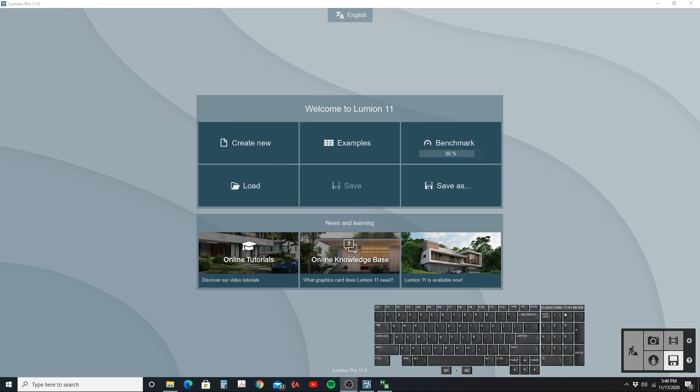Okay guys, so let's go over some of the new features of Lumion 11. And as you can see here in this video, I actually added my keyboard. This is not a new feature. This is just so you can kind of see what I'm doing as I maneuver through Lumion 11. And we're going to go ahead and open up one of the examples. I'm going to open up this downtown development scene, and we will work with that one to demonstrate some of the new features. So just give that a second to load up.

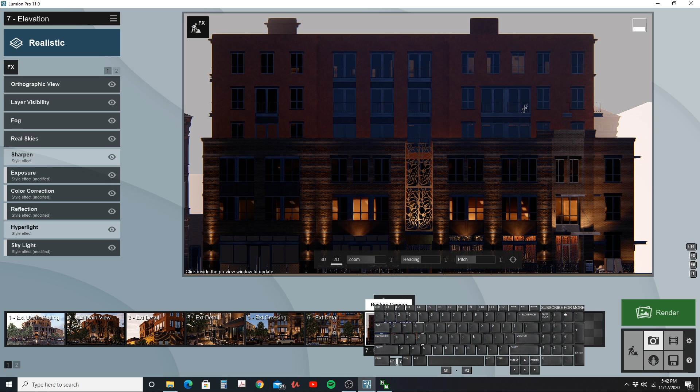Now, one of the new features I want to check out is the orthographic views. So to do that, I'm going to go to photo over here, and as you can see, this looks a little bit different, but not too much that if you're new or if you're coming from Lumion 9 or 10, you're probably fine operating in Lumion 11 so far anyway. So let's go to photos, and here I think this one's already set up as that orthographic view. So I'm going to try and recreate an orthographic view.

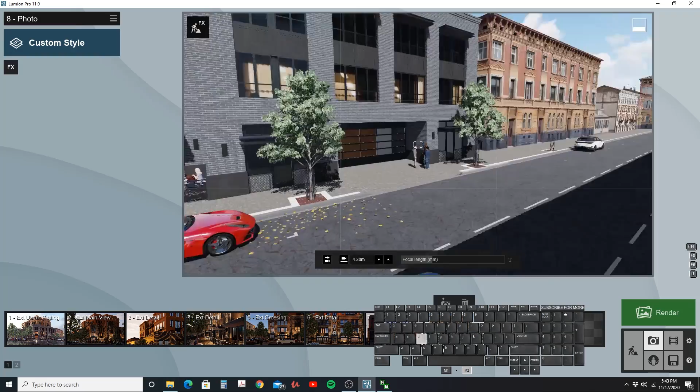So let's click over here, and we're going to create a new scene. I'm going to click to store a camera view, move around, and let's get an orthographic view of this side. So I'm just going to maneuver my camera and get as even as I can with that. And I'm going to snap the picture. And so I'm going to go to add effect. And here in the featured category, boom, it's the first one, orthographic view. So let's click on that and see how it works.

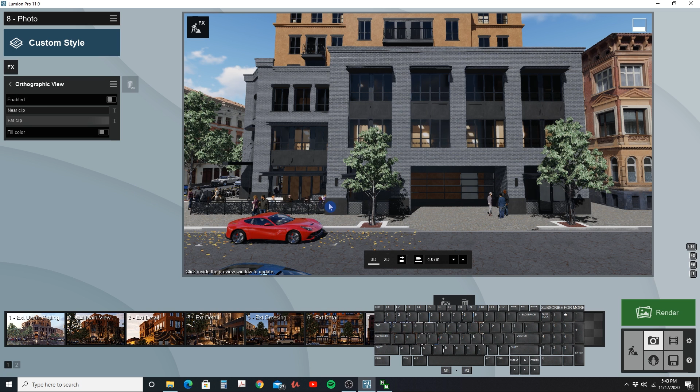Okay, so first thing I want to do is enable it. So I'm going to click here. And there we see it's already flattening it out to that 2D look. So here you can see it toggled from 2D to 3D. So there's your 3D view. Here's your 2D orthographic view. So this is actually a pretty useful feature when dealing with architectural drawings. A lot of the time they're used to seeing it in that 2D view.

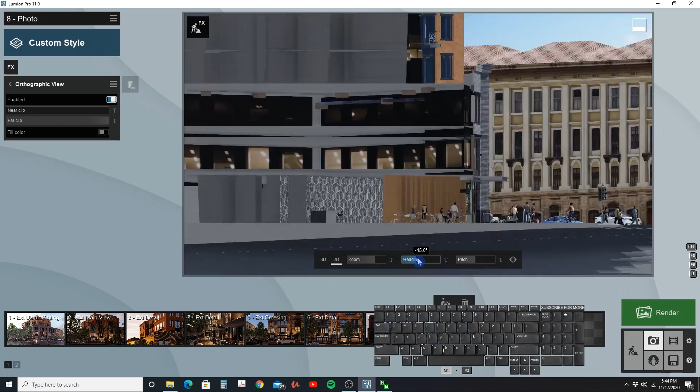Now, how do I get it just right? Because as you can see here, it's slightly off. So I think we have to do that here under heading. See here it's 82 degrees, and if I just slide it, it jumps to those 0, 45, 90s. So that's pretty good. So I'm going to go right there to that 45, and then here the pitch, you can see it's negative 1.9. It's a little off.

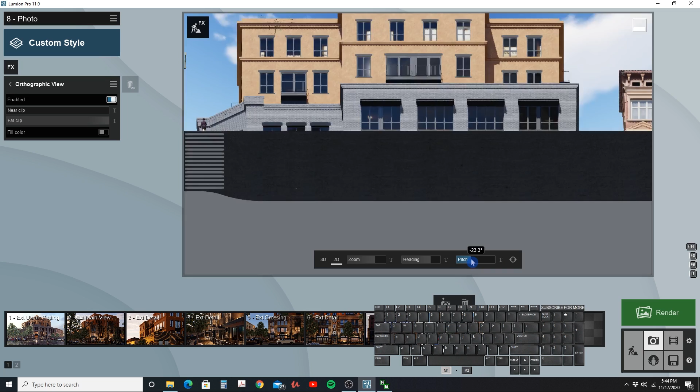So again, if I just click and drag my mouse, it jumps to that 0 point and some other numbers. I'm not sure if it'll let me type in anything. Let's see if it does, and not really. I think I can hold down shift. That's usually a way to very gradually increase your increments in Lumion, if you hold down shift. But I'm just going to try to go to 0, and there we go. So pretty easy. There's that orthographic view.

And let me see if I could rotate it. I guess we could affect our zoom. And here's another couple features I saw. We have a far clip plane. So you see your background is all the sky. So let's say we wanted to clip that. So the far clip, let's see if we can adjust that. And there it goes.

And here we can adjust the fill color. So let's click on this. And there it changes the color of the area that's being clipped. So I clipped the background, which is the far clip, and it just changed everything that's clipped to whatever color I select here. And I can click here and adjust the color to whatever it is.

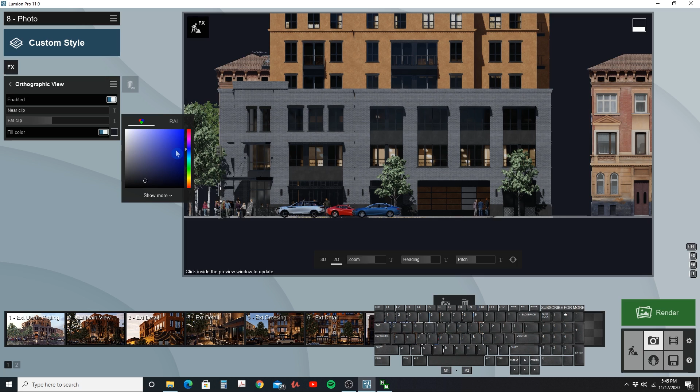So let's say if you're printing out something that's more of a construction document, you may just want it to be white so that it just blends in with your paper. So that's actually a pretty cool feature for the far clip. And then I'm assuming it's the same for the near clip. So we click here and drag our mouse.

There we can see it starts clipping out items in our near clip, or the objects closer to you, and there it just starts cutting everything out until you clip everything. So okay, pretty cool feature, the new orthographic view. I like it. Good job, Lumion.

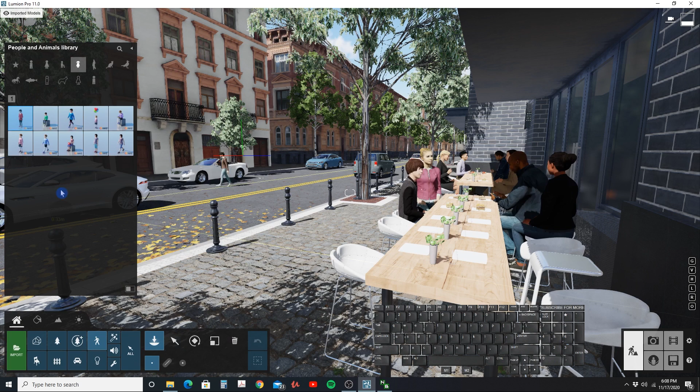Okay, so the next feature that's new to Lumion 11 is they added a lot more characters to your library. So if we go over here and make sure you're selected on this icon here, people and animals, and you go to place objects, they have quite a few new ones. I'm not going to go through all of them, but some of them are pretty cool.

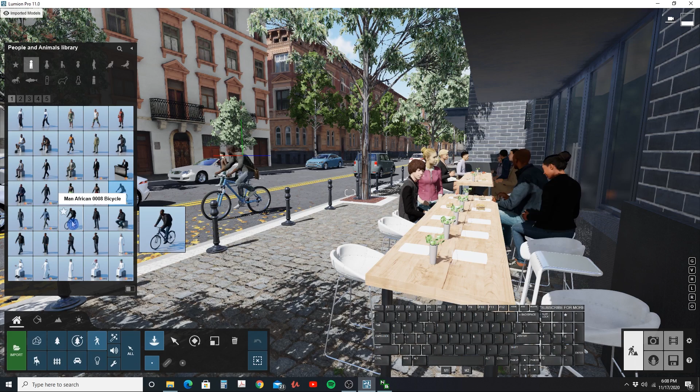Here we have someone on a bicycle. They seem to put a lot of people on bikes. A lot of new people there, which is pretty good. You know, you kind of get tired of using the same ones, so I'm glad Lumion's added quite a bit of new people to their library here, and very good detail as well, as you can see. Kind of get over here, kind of see a little bit better.

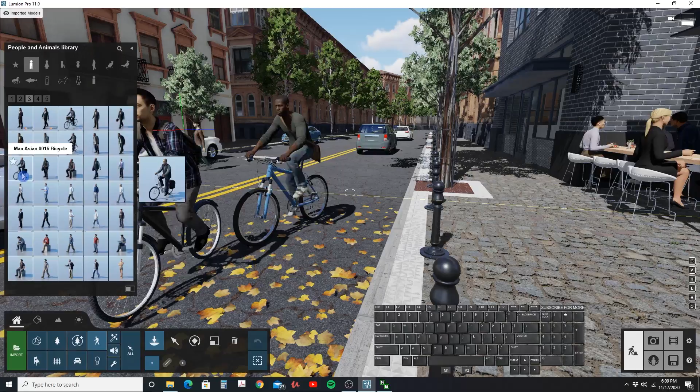And let's go through a few of these just to see some of the new items on here. And some of these, if they're on Lumion 10, you got to forgive me, I don't go through all of them, but it definitely looks like there are some new ones in here. Here we got another person on a bike, lots of bike riders. And even sitting down, I know there's some new ones that I noticed earlier. Let me see if I can find some. And I know in the women's category there was more.

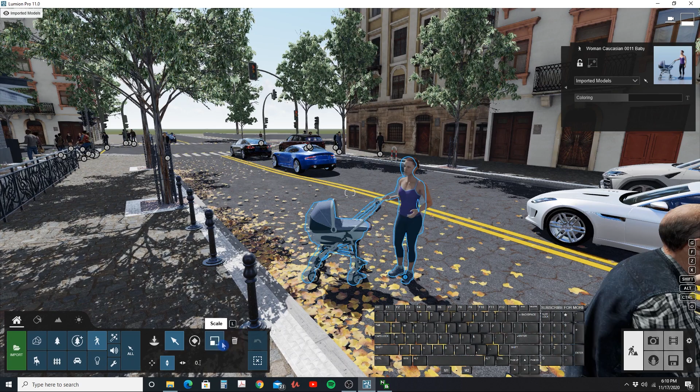So we go over here and let's go over to maybe this number 2 here. And let's see. Yeah, a lot of these look very familiar. I think some of these, they're kind of doing a little bit more. I'm gonna delete that one. Let's see.

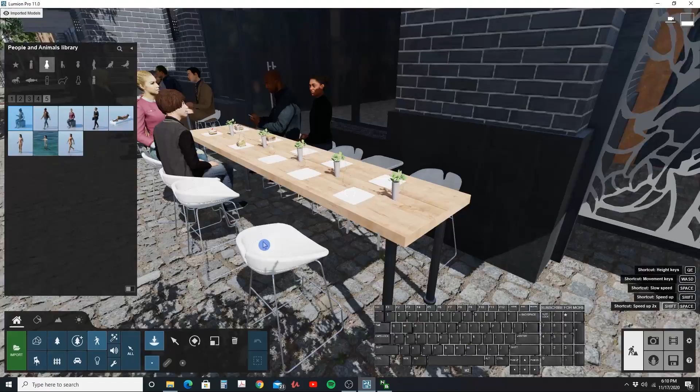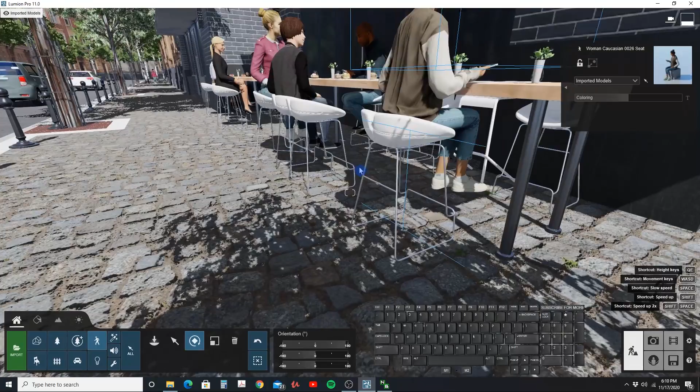And have you ever wondered how to set these just right? You can hold down shift and use the up to just move them slightly. And if you go over here to rotate, you can rotate them to the angle that you want. And it looks a little off because they're sitting high up there, but shift them in place there. If we move her in here a little bit more, hold down shift and just slide them. And that looks a little better.

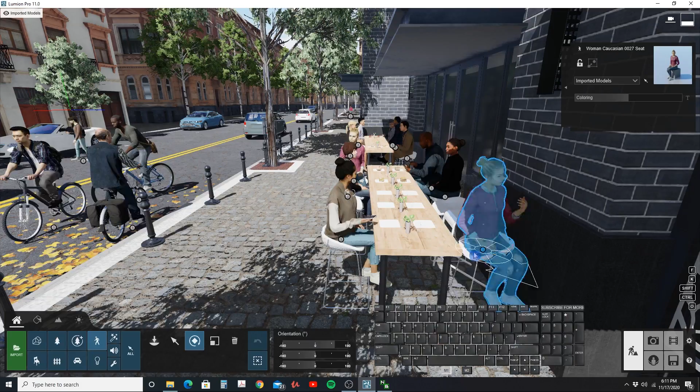And I believe that's a new character as well. I don't remember that person being in one of the selections before. And here I believe this is another new one as well. So we can click here and just rotate her. And that one seems to fit pretty nicely on there. So pretty cool, some cool new people. I believe there's one over here of this guy on a skateboard, which you may have seen in some of the previews.

And there you go. So obviously you can go to your video animation and actually make some of these people move. And I think we can see some examples here. These are some preset settings from the scene, and you see some of these people in action. And let me go ahead and do something here. Let's see if we can hit copy effects, and we'll create a new scene. So I'm going to zoom in down here to these new ones that I created.

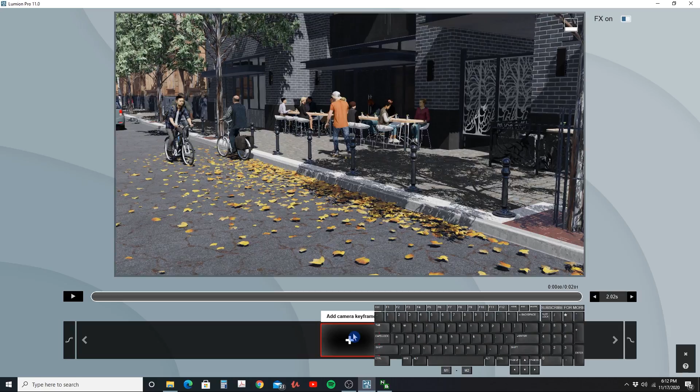I'll go ahead and click add camera. And we'll add another scene. Go ahead and click OK. And if you click here, we're going to see they are all static, right? They're not moving. So let's see if we can make them move. I'm going to go to FX. We're going to go to animate and we'll go to advanced move.

And we'll select some of these guys here. We're going to go to move. And I'm going to set my time down here to the beginning of the scene. And we'll move him back here. And we'll move this guy right about here. And we're going to try to avoid an accident here. Let's see if we can move him about there.

Okay. So if we time it out, here we can see our time measure here, 1.3 seconds. I like to count it out myself, so I just go, 1, 2, 3, 4, whatever it is. Actually, we'll go all the way to the end to 9 seconds.

And so I kind of like to move my characters here and kind of count out that time to what I think it would take them. So let's say if they're starting maybe down here and we want to go to the end. Whoops, I kind of messed that up, didn't I? So let's delete that. The beginning point, we're going to move him back a little further. Then we're going to go all the way to 9 seconds.

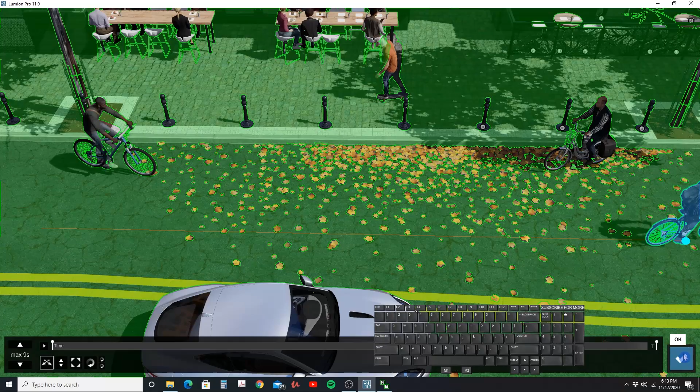And I'm going to hold it down, just go 1, 2, 3, 4, 5, 6, 7, 8, 9. That speed to me feels about right. I'm going to click OK. And now if I click play, we'll see if that kind of looks right or if it looks like he's moving too fast. And now it looks like he's moving maybe a bit too slow.

So in order to fix that, I'll just go back to my advanced. I'm going to go all the way to the end of the time. And let me find him again. Here he is. And I'm just going to move him back. Is that right? No, we need to move him forward. There we go. Okay, so I'm going to go ahead and click OK. And we'll hit animate, and there we go. He's moving. Okay, to me that looks a little more natural.

And you can do that with all your characters. So pretty cool. I like the new features that Lumion has added, the new characters I mean. So another one, good job Lumion.

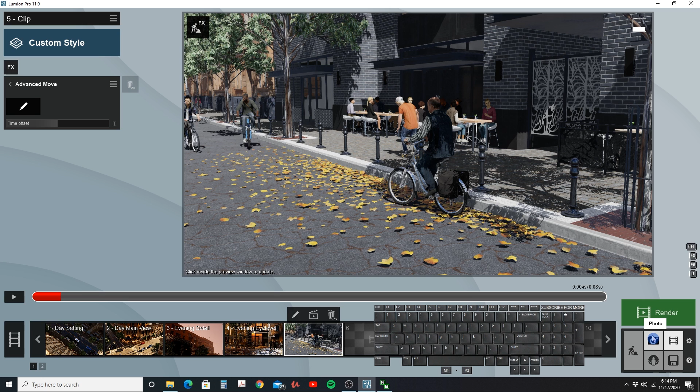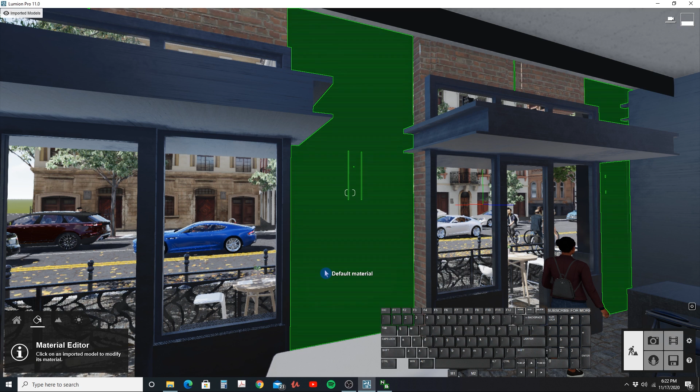Okay, so another new feature is that Lumion has added some new materials. So let's go ahead and try them out. I'm going to go ahead and select this default material, and really it seems like they've added materials to pretty much every category. So if I go to here to, actually I want to go to indoor. Let's go back, hit indoor. And some of the newer ones I've noticed were in the tiles category.

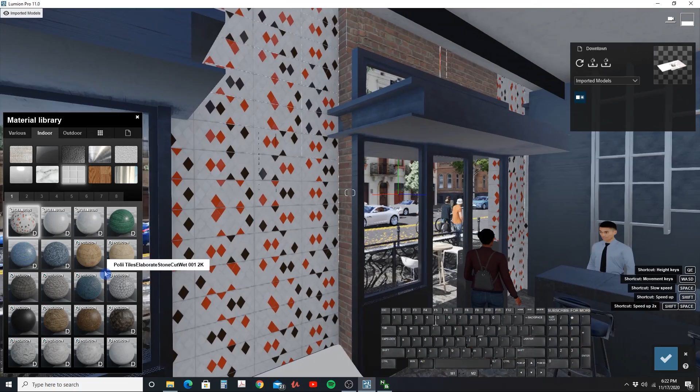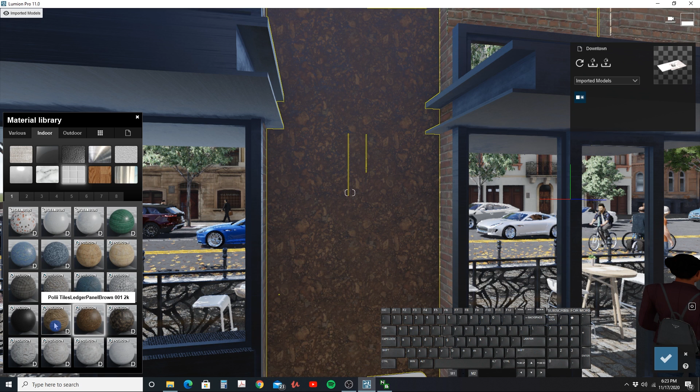So if you just click through these, they've actually added some pretty interesting ones that I think would actually be useful, because a lot of times I end up just finding my own textures, but it seems like they're actually coming up with a pretty good library of some pretty useful materials here. And you just kind of go through them. Again, I'm not going to go through all of them, but you can see that they've added some pretty unique textures, some pretty nice ones that you can use in your model, and they look pretty updated, I would say. But then they also have their older ones here as well.

And of course you can modify these. So if we go here, double click, we can change some of the reflectiveness of it, the relief, kind of see what's happening there, the displacement. So it gives us all those parameters that we can adjust. So pretty good. I kind of like some of these new materials that they've added.

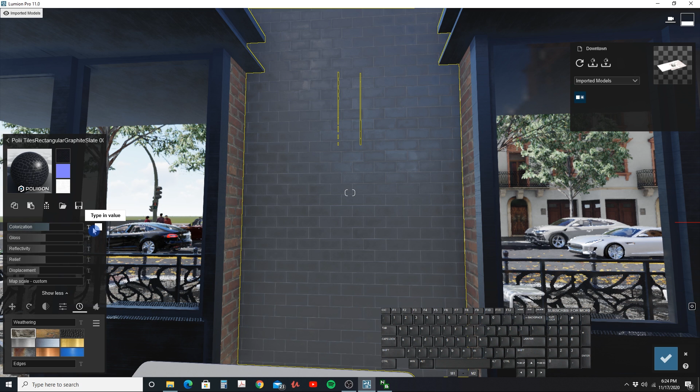There's a nice one there. There's some kind of a subway tile there. Let's see if we can adjust that. Let's see if I went here. Yeah, once you change the colorization, it kind of just washes it out a little bit too much, but not a bad looking texture.

All right, so I'm pretty sure in every category there's some new materials. So let's say if we go to indoor again, and fabrics, again we see some new fabrics that they've added. So maybe these would be good for a carpet, or maybe even some type of a chair material or something. So some pretty nice ones. And let's see if we go to the end here. I think there are some here.

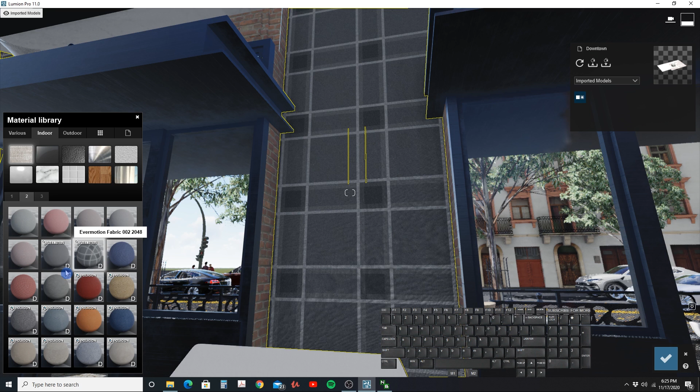It's a wicker material. That one looks like a wicker that's kind of see-through. That's pretty cool. Okay. And I believe that's one from the previous version there. So they're kind of all mixed in there. You'd probably have to go through them all to see what's new and what's just the same as what they had before. But definitely an improvement to the Lumion 10 library.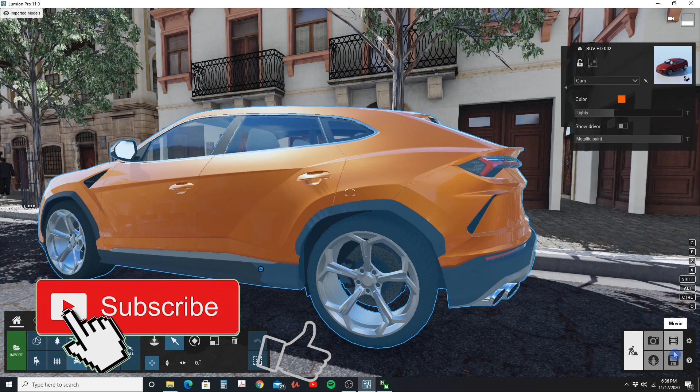Let's go back to our scene here, and I'm just going to click here, and I'm going to go ahead and render this. And let's go to render. Just going to render it right here. This is desktop, and I'm going to call this one just Urus. Yeah, Urus, and then the other one we'll save as Urus non-metallic. So go ahead and let that save, and then we'll do a side-by-side comparison to see how the new metallic material works.

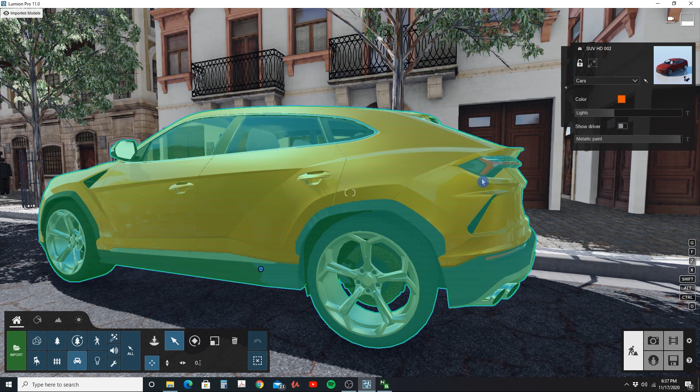Okay, so go ahead and click here. Let's go back to our build mode, select the vehicle, and let's lose the metallic paint. Let's go back to photos, and let's save this rendering again. Go ahead and click render, and I'll save this over this other one I did earlier, Urus non-metallic. And we'll go ahead and overwrite that. And there you can see already, seems like it has a little bit less reflection going on. Doesn't look bad either way, but one just has a lot more reflection than the other.

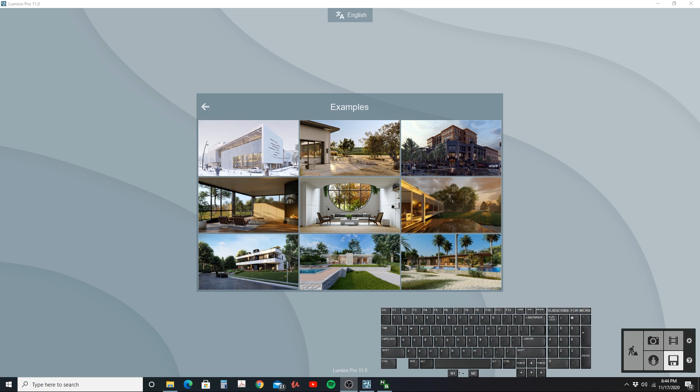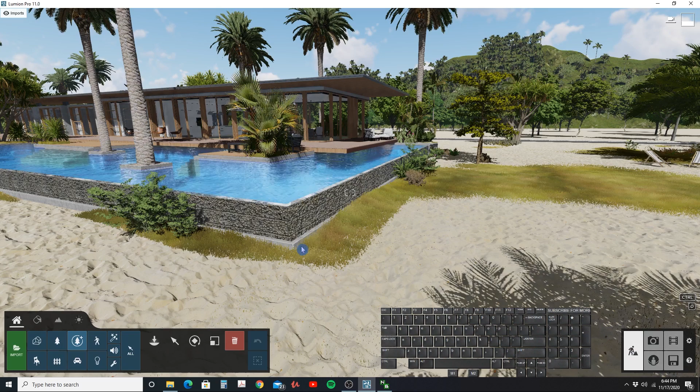Okay, so another new feature is they added more fine detail nature to the library, and to show that I'm just going to go to my beach house scene over here, or their examples, and we go over here to fine detail nature and go to place objects. And we can see that they kind of enlarged this library. So if you go through the pages here, you can see they've added quite a bit. And if we select some of these, let me select this maple tree. You know, I see a lot more detail, which obviously is fine detail.

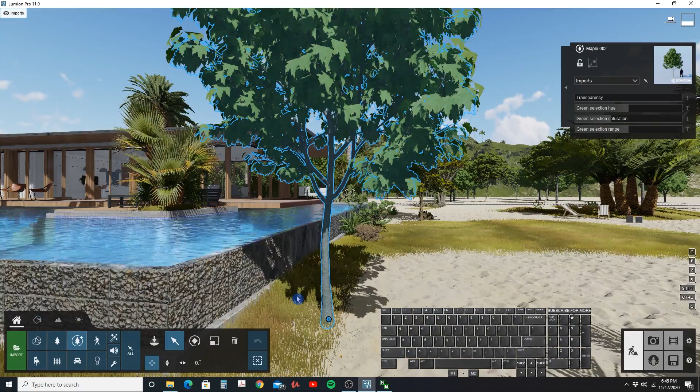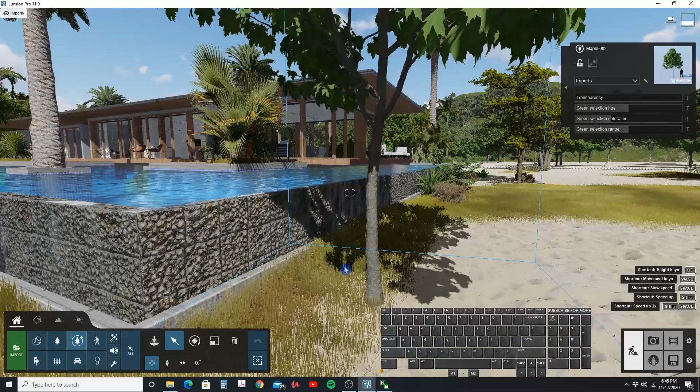The only bad thing about using these is obviously it's going to make your projects take a little longer to render. As far as maneuvering around, they don't really affect it too much. But I think it's really just in that render time. So you just want to only use these if you're really focusing on a close-up image. You can see the tree trunk there, a little bit more detail than your normal nature items. So if I go over here, we can see just some of the other ones that they have.

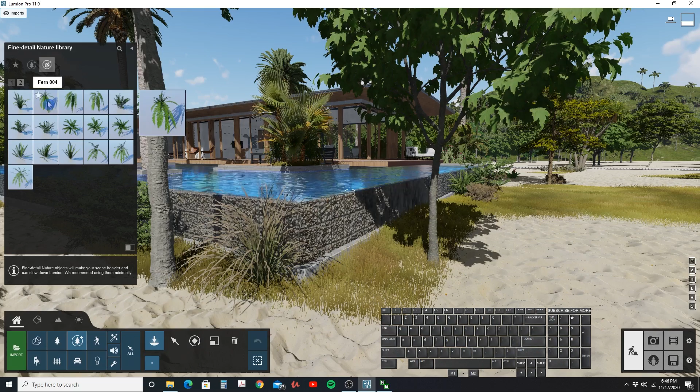And if I go over to the plants category, they've added some more items there as well. Seems like they added a lot more ferns. And let's see, here it is. What is this called? A sedge. We can change the scale of these. And let's go over here. Just going to place some of these ferns that they added. So we got a fern there.

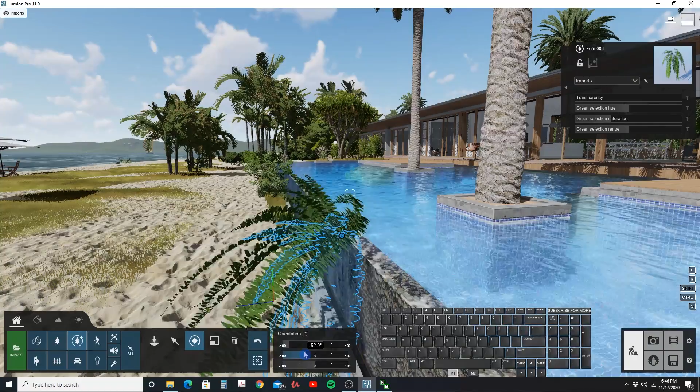And some of these look like they kind of attach to a wall, or maybe growing off a wall. But of course you can rotate these if you need to. Rotate them this way if you need to change the angle somehow. Or maybe growing out of a plant. If you had a plant vase, that might be a nice feature to have there. So some nice additions to the Fine Nature category.

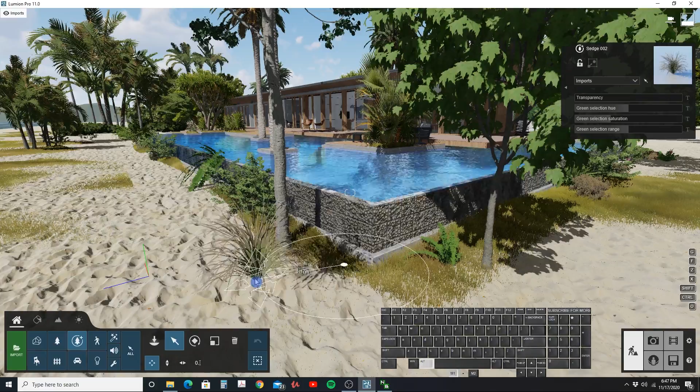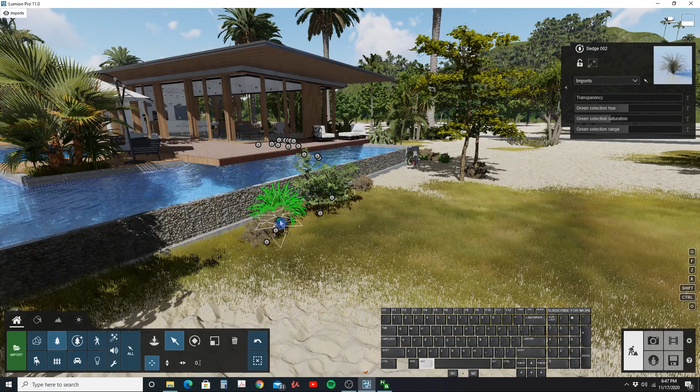Now, one thing I am going to complain about with Lumion, and this is from the earlier versions, and they have not corrected it in this later version, is when I select a Fine Nature object and I want to make a copy, it will not let me do that. Now, if I go to a regular item, so let's go over here. I don't believe these are Fine Nature, so let's go to just regular nature objects. If I hold down Alt, I can make many copies of it. Fine Nature objects do not let you do that. So in order to do these, you'd have to import a new one every time.

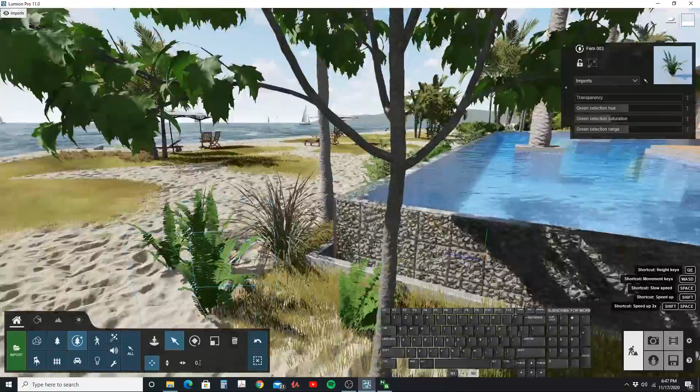So let's say if I go here to place, I wanted to place one of these. I can place as many as I want, but if I just wanted to grab one and copy it over, it won't let you do it. So I'm not sure why that is. Maybe it's just because of how detailed they are. Not sure, but it would be nice if we can copy those because they are very nice objects.

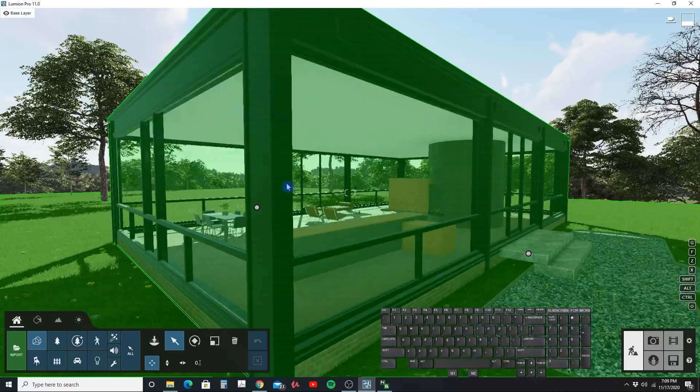Okay, so the next new feature is the rain streaks feature, which I think is pretty cool. So here we have this glass house, and one thing you want to make sure of is the glass that you want the rain streaks to fall on is not being covered by a roof or something. So you want to make sure that rain could actually touch it and it's not being blocked. So we have to go to either a render scene or a video scene, and we'll start with the movie scene or videos here.

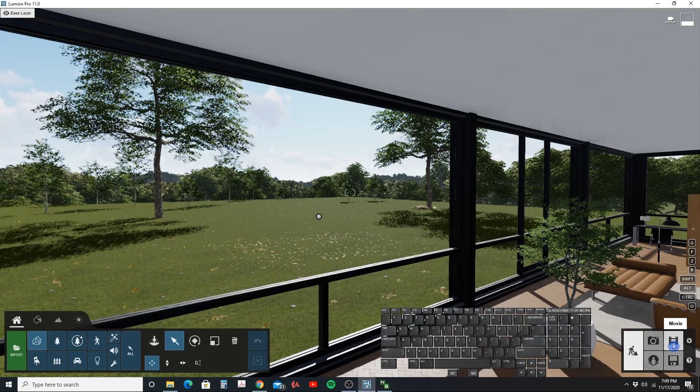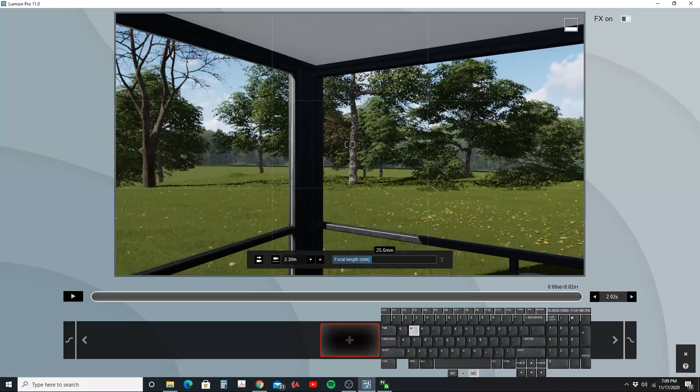And let's go ahead and we'll create a quick scene. So I'm going to go here to number 4, and we'll go ahead and zoom. Let's change the camera angle here, and we'll actually go from the inside here, and we'll just kind of zoom in pretty close to our glass. Take a few keyframes, and that's good.

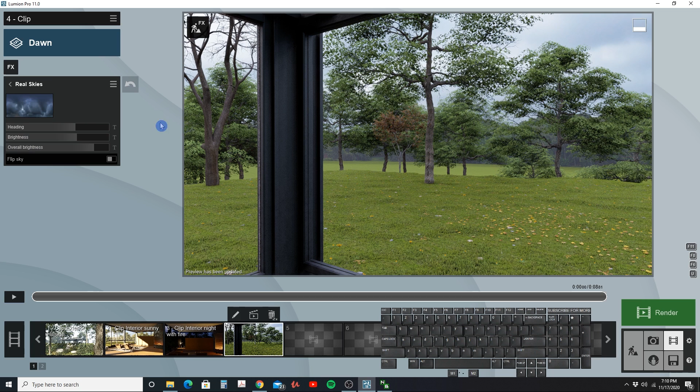And then now let's go to our custom styles. Let's just pick a dawn scene, and I'm going to change the skies to an overcast. Something looks rainy. How about that? And we'll make it a little brighter outside. We click there, we kind of see what's happening. All right, that looks like it might be raining there, so I'm going to go into effects. We're going to go to our weather right here, precipitation, and here we see everything's the same, but we have a couple new features over here.

So I'm going to click this, the size of our streaks, and there you can kind of start seeing the streaks happening there. And the streak offset. So if you want to make them stand out, you can make them pretty large. I guess you could change the amount of streaks if you just want a few or a little bit. Particle size, that doesn't really affect the streaks too much. And the rain amount, that just affects the rain amount outside.

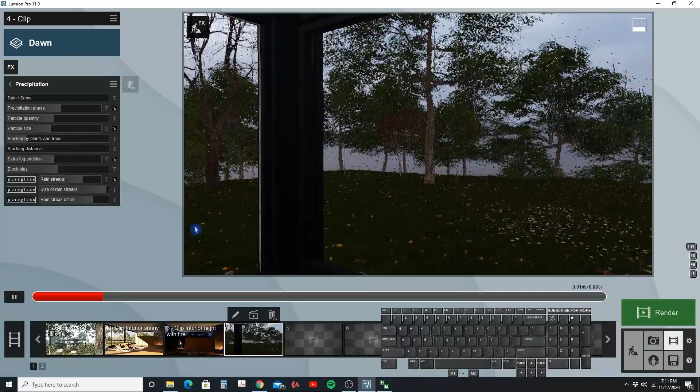So let's see what happens when we just hit play, and there we kind of see the rain streaks falling down. So pretty cool feature. I like it. Pretty easy to use. Again, just make sure that wherever you're trying to show those rain streaks, that it's not being blocked by anything.

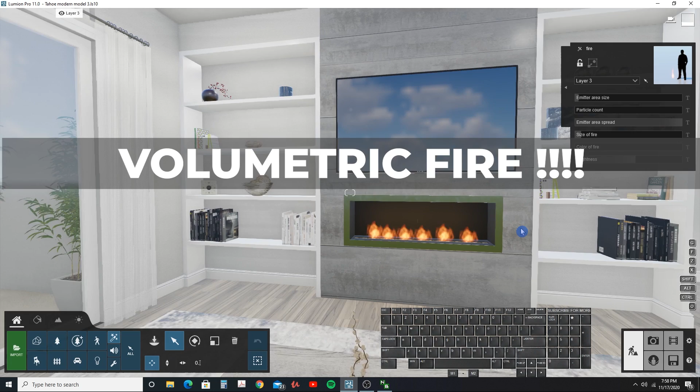Okay, so this next feature I actually am pretty excited about, and I think it's about time that Lumion did something about this, and that is the Volumetric Fire. So here I have, this is what I would normally do, which I always hated and I think looks pretty bad. So this is their effects here, and if I select all those, if I go to place, this is what I would usually use.

I would just go to fire, use this small one, and I would just copy it a bunch of times and try to get it to look like it was a fire going on there, but it just looks like this choreographed Hawaiian fire show. Nothing against Hawaiian fire shows. Those are actually cool. This looks kind of ridiculous, I think. So I'm very excited about this new feature that they did.

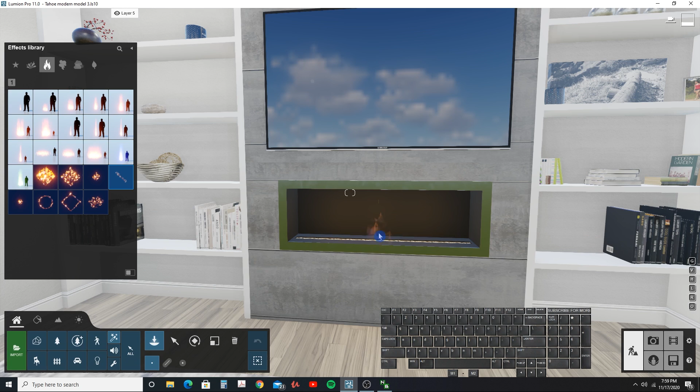So I'm going to go ahead and shut this off, get out of this layer, and see if I can move to a different layer. I'm going to put in this new volumetric fire that they have, and just place it right here, and select it.

Here we can see there's some new parameters here that we can adjust. But first I want to adjust the rotation of it, and you can kind of see where it's orienting. I want it to go long ways for this linear fireplace.

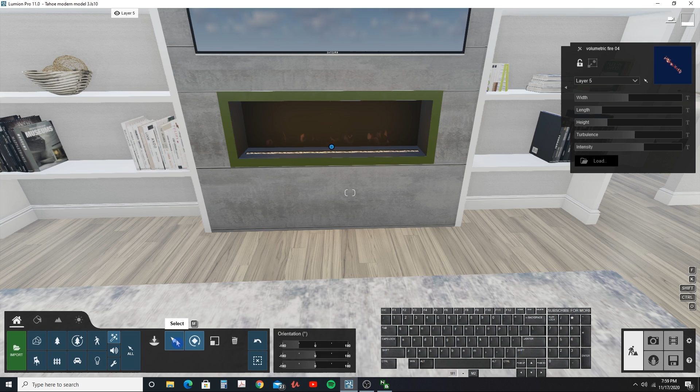I'm going to use this select to move it, hold down shift, and just shift it into place. Actually it's pretty darn way off, so let's see if I can get it in here and move it where I want it. Right there, there we go. Much better. Now let's play with some of these parameters.

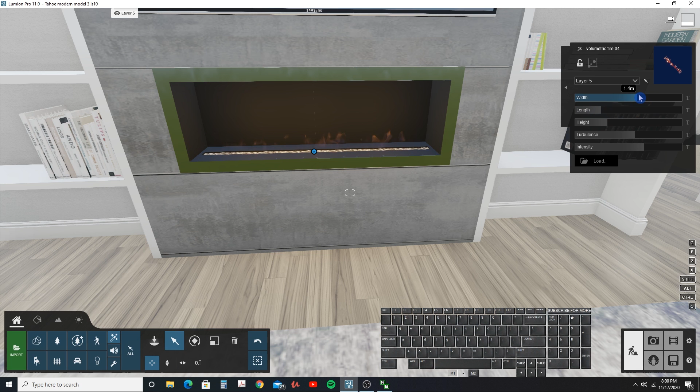I can play with the width of it, and there we can see it's extending further out. And here we're going to do the length of it, which to me feels more like the width - it just depends on how you're orienting it. The width looks like it's going a little too far out there. And the height of it, so we can adjust the height of our fire.

That's pretty cool. The turbulence - with very little turbulence it looks like a smoother fire. If we add more turbulence it kind of gets distorted, more turbulent, so it looks a little more busy.

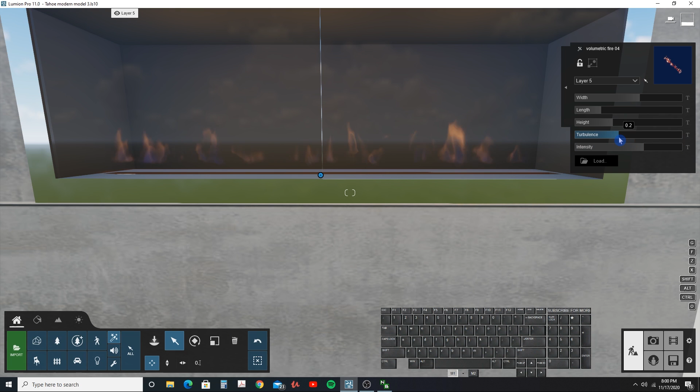So let's say we want to keep it right in the middle there. And here we can adjust the intensity of it, so that's just kind of intensity, maybe brightness - could compare that to brightness a little bit.

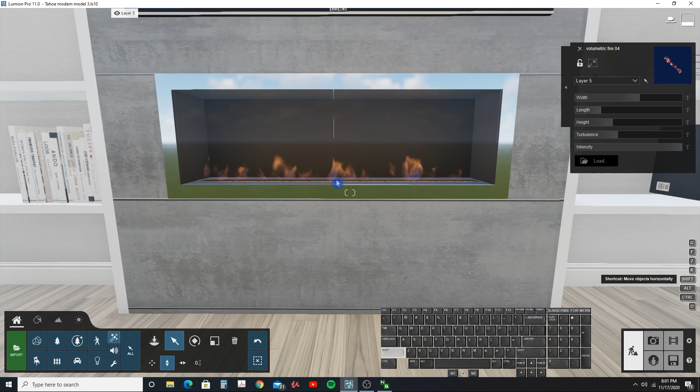We don't have brightness anymore, but I don't mind because it looks so much more realistic. I could try to bring it down lower if I wanted to make it look like it's right on there, or I could just leave it where it was. Either way, I think it looks good.

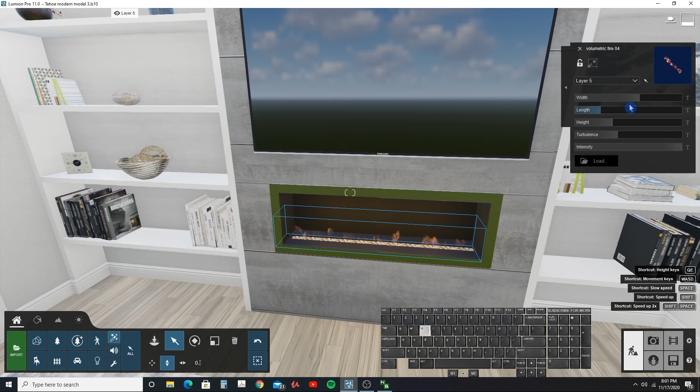Let's see if I can get a shot there. Intensity's up, the length of it - trying to get it to see if I could get the flames a little higher. I think the only thing we can do there is - oh, here we go, height. There we go, so probably wouldn't be too high, maybe just leave it about there.

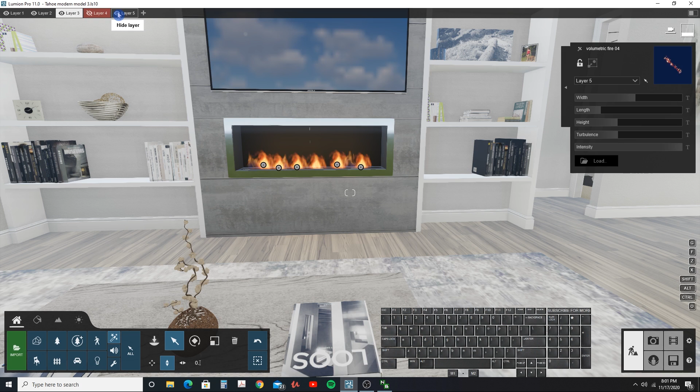That looks nice, so awesome. That looks 100% better than what I was doing before. Just compare those - this is what I had before. Go to layer 4 here, shut that off - that looks ridiculous. If we go back to layer 5 and turn that one off, 100% better.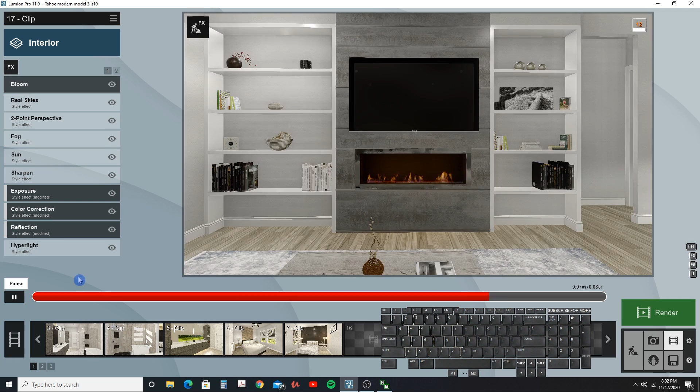If I go to a little movie scene that I have here, we can see how it looks in action. Let's go ahead and hit play. Yes, that looks so much better. Thank you, Lumion - Volumetric Fire, awesome new feature of Lumion 11.

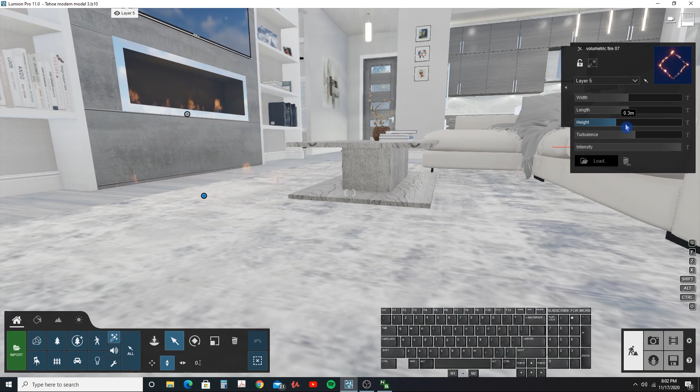There's more fires that we can choose. If I go to place, I haven't played with all these yet, but there are different shapes. Let's say if you had an outdoor grill or outdoor fire pit, you might use some of these. See if we can see it - I can't really see it there, but it's there. Very cool, I think that's going to be a popular new feature, and you'll probably see that in a lot of new interior videos.

That other one, I really don't know what you can use those for - I didn't like them too much. So great job, Lumion, on the volumetric fire.

Okay guys, so that was a brief overview of some of the new features in Lumion 11. There are several more - if you go to lumion.com you can see a more detailed description of all their new features, and I think it's a big improvement. I like it, and the improvements they made are things I'll definitely be using in my future renderings. So if you're looking at upgrading, I think it would be a great upgrade.